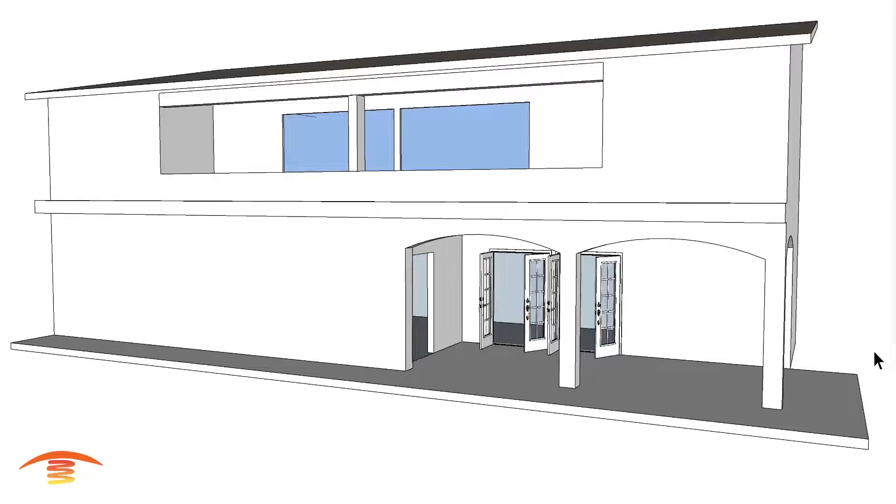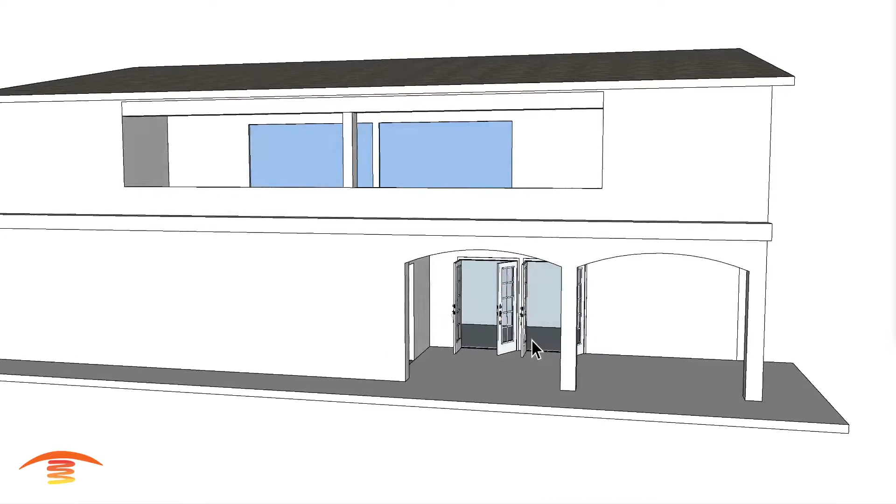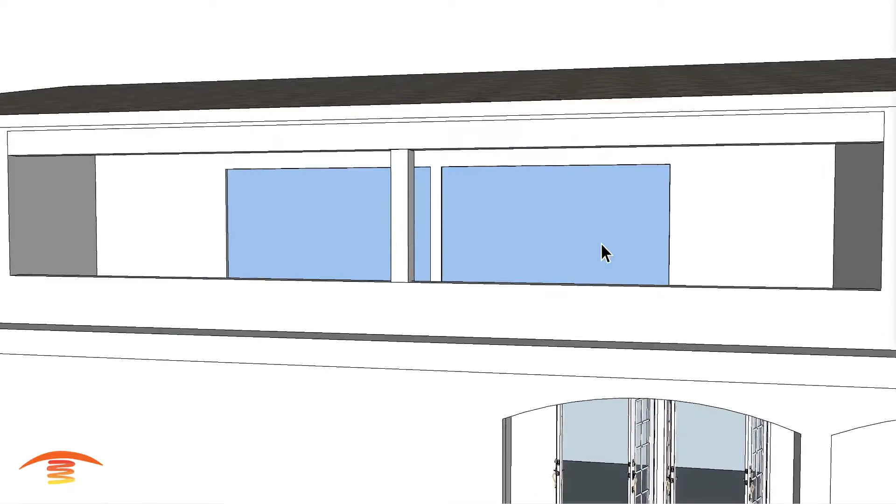Now let's get heating. We have this residential application, and there are two different sections they're interested in heating. This residence is still under construction, so there are some unknown issues with regards to seating and things of that nature. Also, upstairs here, I have this area with glass windows.

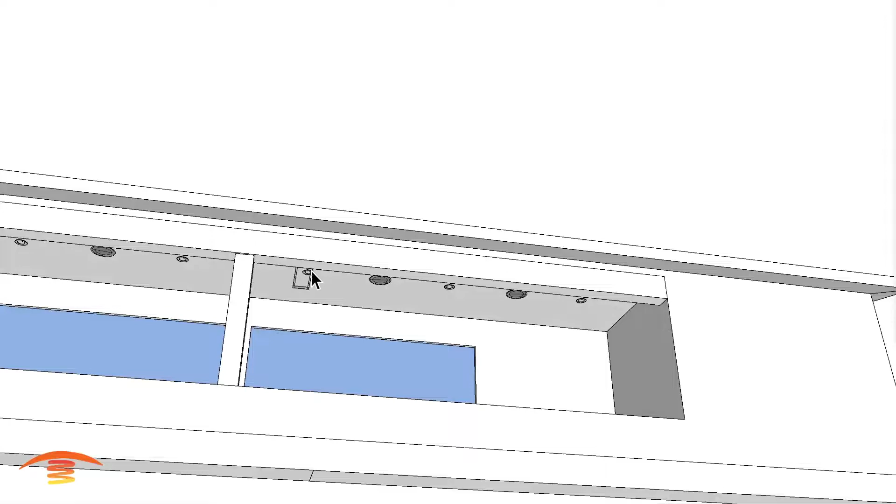Not sure of where the location is, so what I've done is taken the distances from the center and moved this 3.5 feet, this 3.5 feet, and this would be in the center of that. This lamp to this lamp would be 6 feet, this speaker to this speaker would be 6, and 6 feet to here, and the same is true on this distance over here. I just have them centered within the span itself.

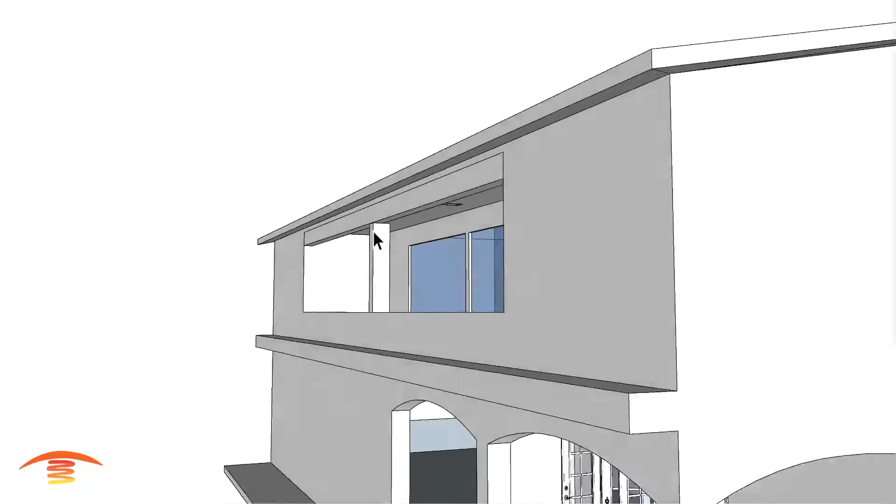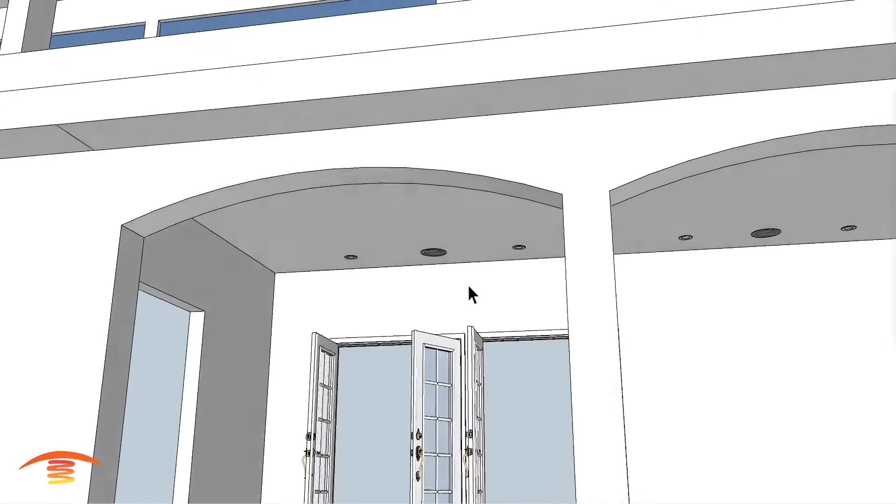This area here, we have some speakers and lighting. I have them 18 inches off of this edge of the wall to the center of the elements, lighting and speakers, and then 6 feet center to center, and then centered within this span here. Not quite sure exactly where they belong, but that's where I have them.

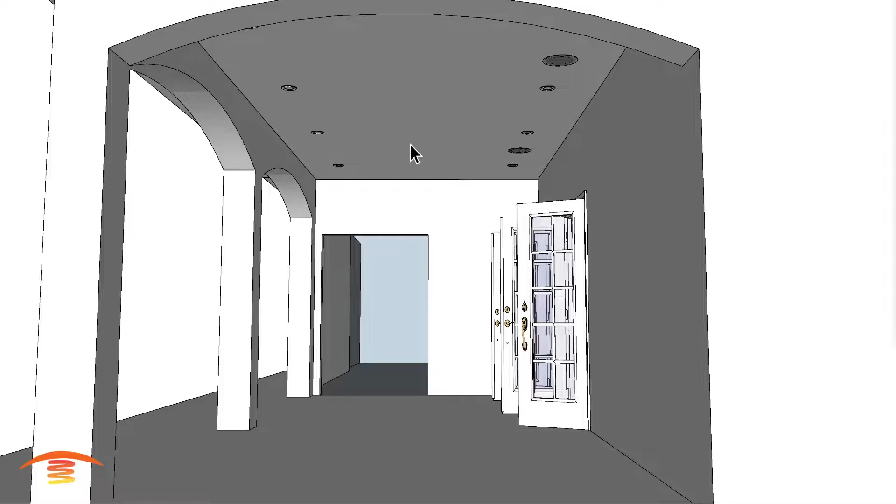Also, we do have French doors, or doors I should say, that swing out into the patio, so that's something else to look at. They did mention there's a possibility for fans in the center of this area, maybe 2 fans, probably more central than this spot here and this spot here. Again, I don't have the exact dimensions of those locations.

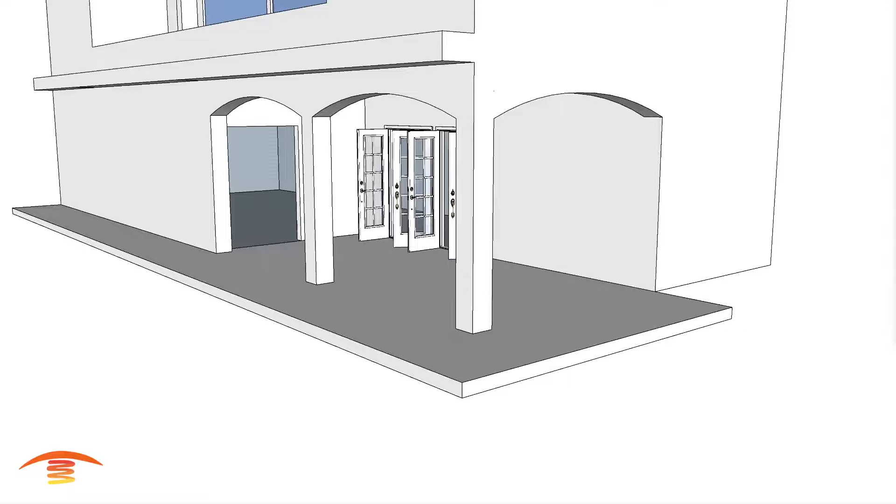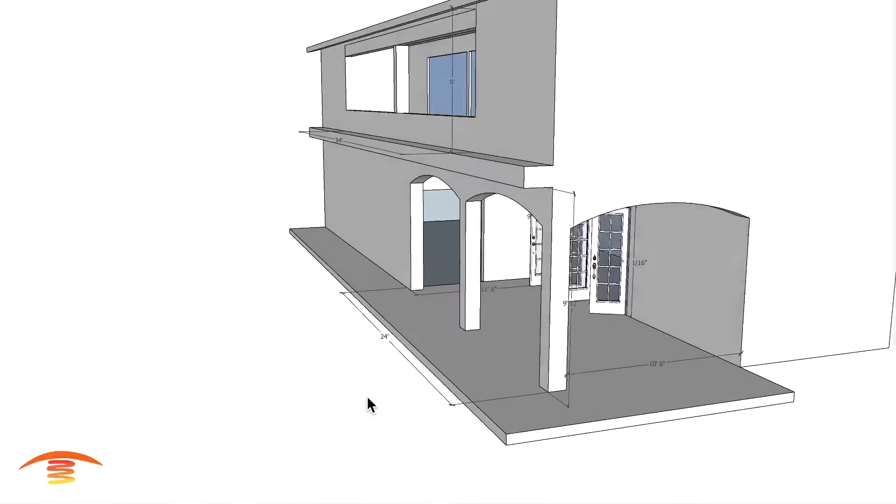However, if you want to have heaters in here at all, that probably cannot happen with regards to where they're located. So let's look at the overall dimensions. I have 10'6" from this wall edge to the inside edge of this pillar, and 11'6" to the outside edge here. I have a ceiling height of 9'11" to this ceiling from the finished floor. I have a total distance of 24 feet from this wall to the outside edge of this pillar.

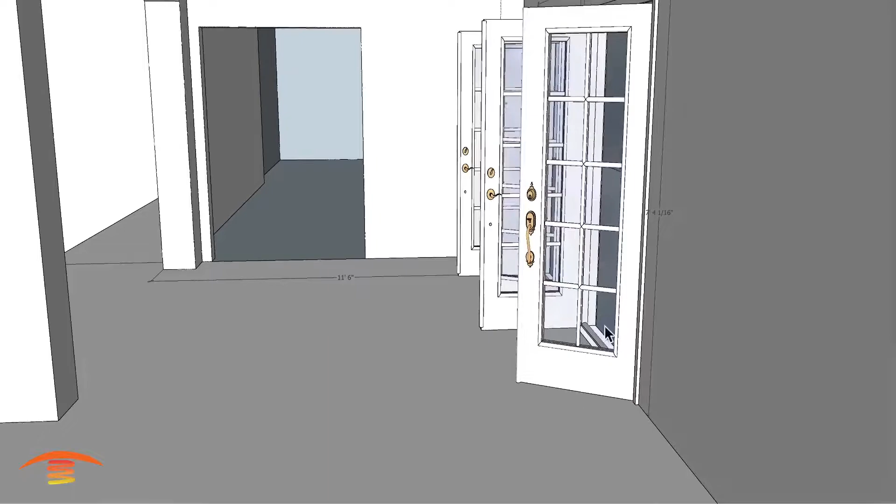Let's see if there's anything else. I do have the doors at 5 foot apiece, and that's very important because of the distance these doors are going to swing out into the residence itself. So it's important. I do have them about 7'4". Now they could be a little bit different in height, based on the trim, etc. Anything else here? I think that's about it.

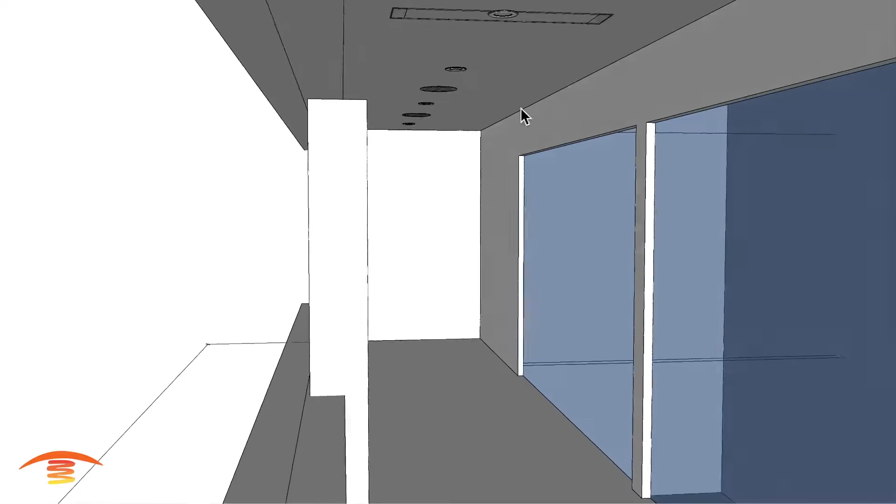Over here we have 34 feet by a ceiling height of 8 feet and a depth of the inside area here of 5 feet 4 inches. So that'd be from the inside of this beam here to the inside of the wall here, and 6 feet out to the edge there.

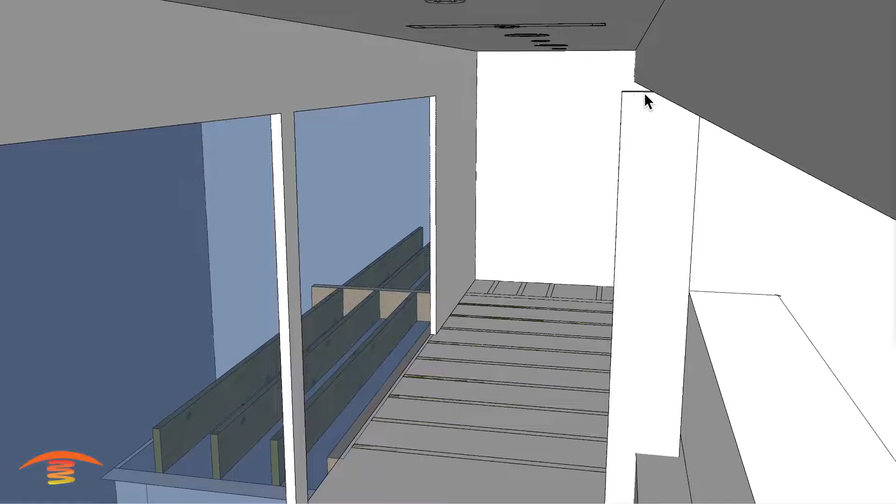I did notice that this column here protruded into this area, so that might be an issue that you need to look at, just because of the placement of heaters.

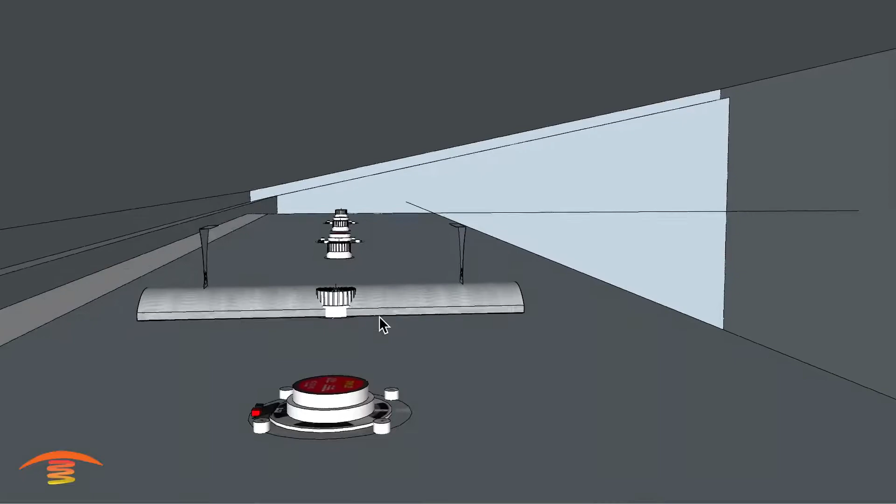Now, I'm going to go straight into this first, which is the upstairs area, and you can see here I have this unit possibly recessed into the ceiling. Number one issue might be, is there a light fixture there or not? I don't have it in the center, but the main issue...

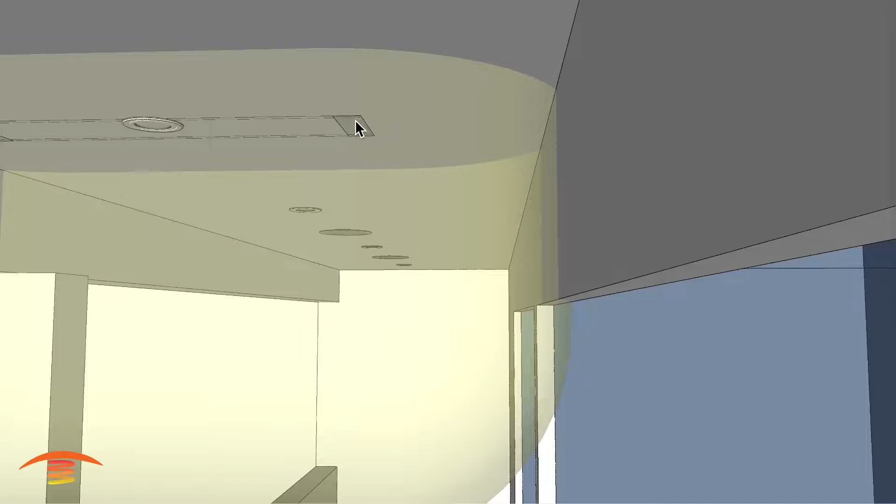The main issue is that we need to have clearances to combustibles below, which calls for, from the edge of the heater, not the frame itself - the frame would be a little bit larger, the flush mount frame - but from the heater itself we need 18 inches, and you can see we're not meeting that here, and we're definitely not meeting that here. So I can't see how we could recommend placing a heater like this. I'm just going to remove that.

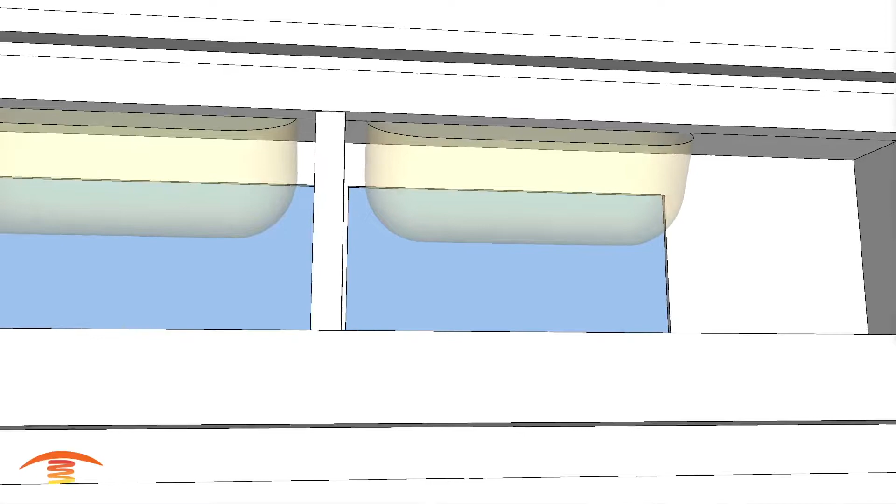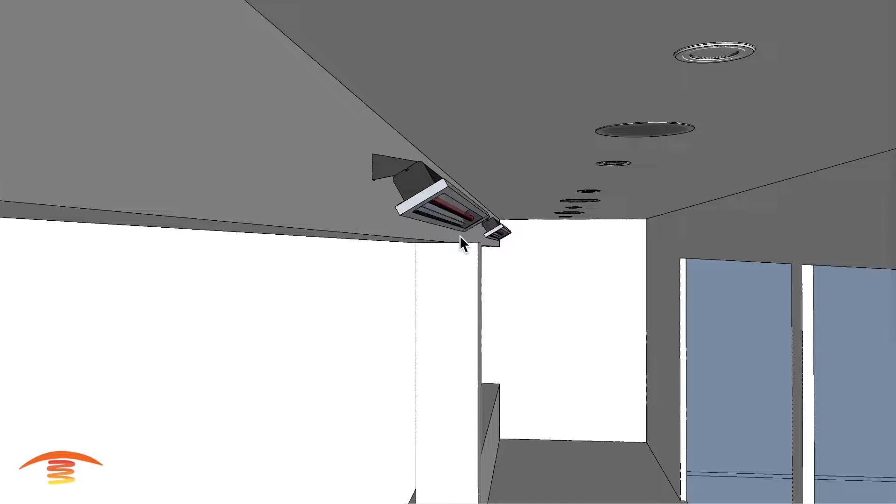All right, let's see here. The only other option that we can do is to possibly place a couple of units here, along the inside edge. So the heater itself, when it's mounted on a wall or a vertical surface - this is a slimline 4,000 watt unit - I have it at 60 degrees down from straight out, or you might consider it 30 degrees up from straight down.

And I have it attached so that we're meeting a clearance of 6 inches above, and that's the main thing we need to do on a slimline unit attached to a vertical surface. So that's what it would look like.

Let's see here if I can show you anything else. I do have them at 10-foot centers to center. Then going ahead and looking at the footprint of heat, the footprint would cover the inner space fairly decently, but we're still missing about 8 feet here and 8 feet over here.

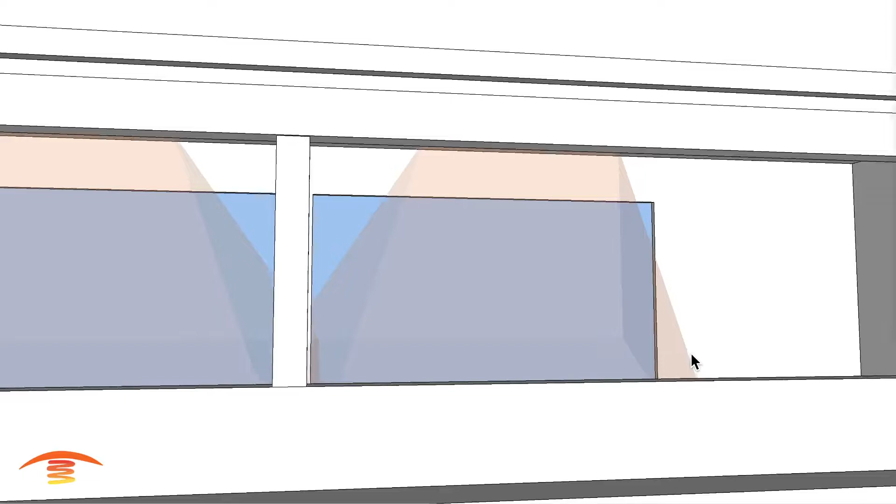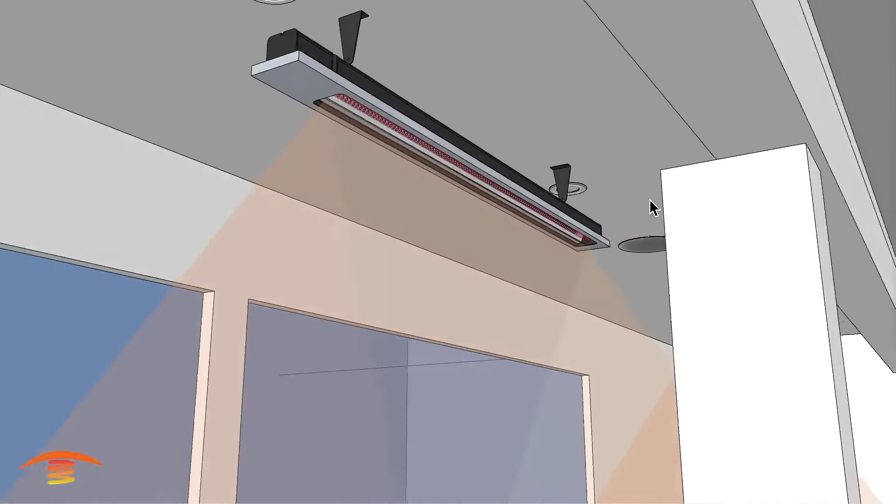So that's the best I can come up with regards to this little column piece here. Let's see if I have that here. If I put it in the center, you can see that I need to maintain a clearance of 18 inches here, and that's that issue again. If this column wasn't as protruding as I think it is, then we could do this setup here, but mount it up on the edge where we're getting better coverage throughout the whole span.

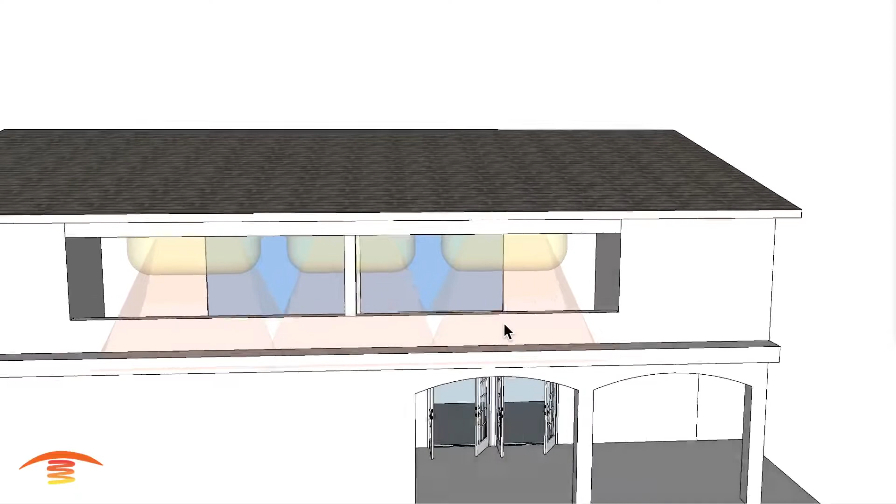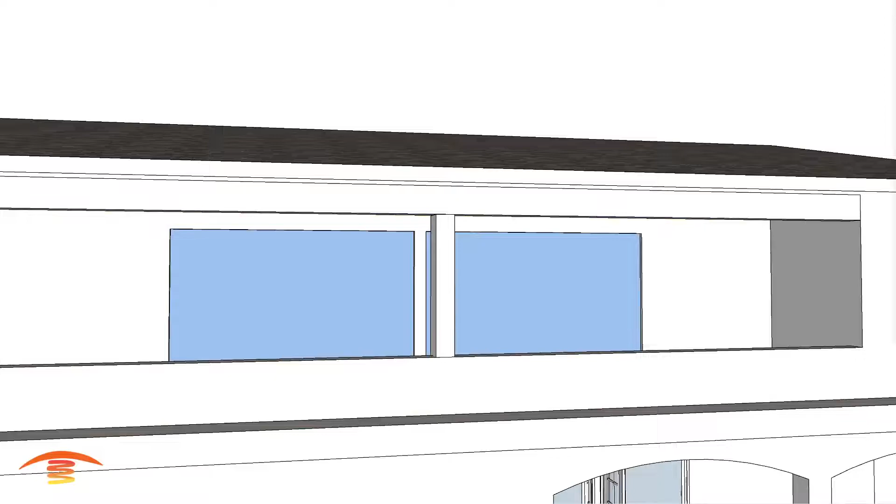So 3 units would really be the best, but visually speaking, this setup where we're mounting it on the beam itself would look the best. But again, having this column with this post protruding out, we are not going to be able to meet that clearance that we need to.

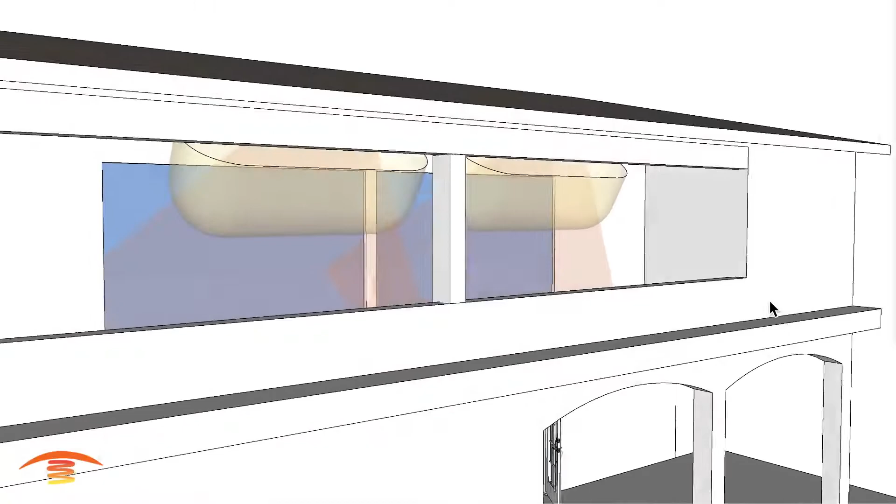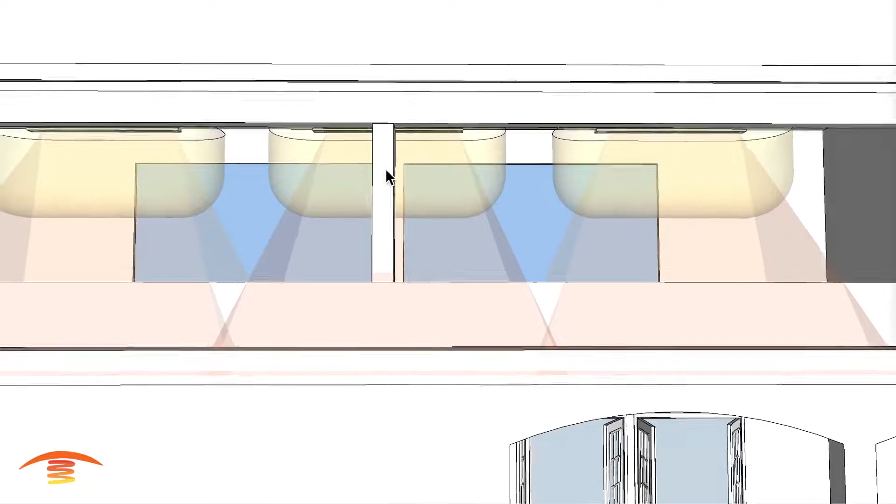All right, well, that's the upstairs. So that would be possibly 2 of the slimline 4,000 watt units, or possibly 3 of the slimline units placed in this configuration. Again, these are 10-foot center to center. This is centered in this room or space, and then again, 10-foot out to each edge. So again, that's upstairs.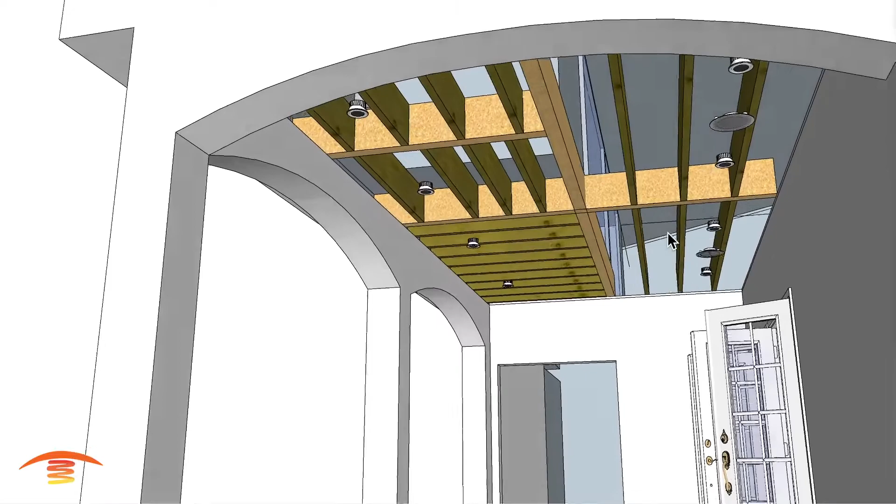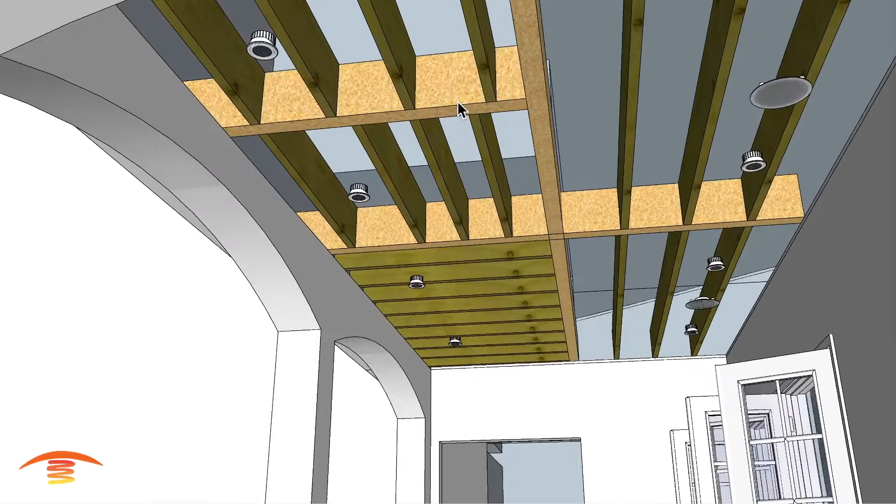Let's look at what we could do downstairs. So downstairs, first I'm going to talk about the recessing ability up here. I don't have all the dimensions, and I'm not sure exactly the locations of the lighting, etc. But I do see visual issues with regards to some engineered supports or beams that I don't believe you can cut into and make a frame for a flush mount unit.

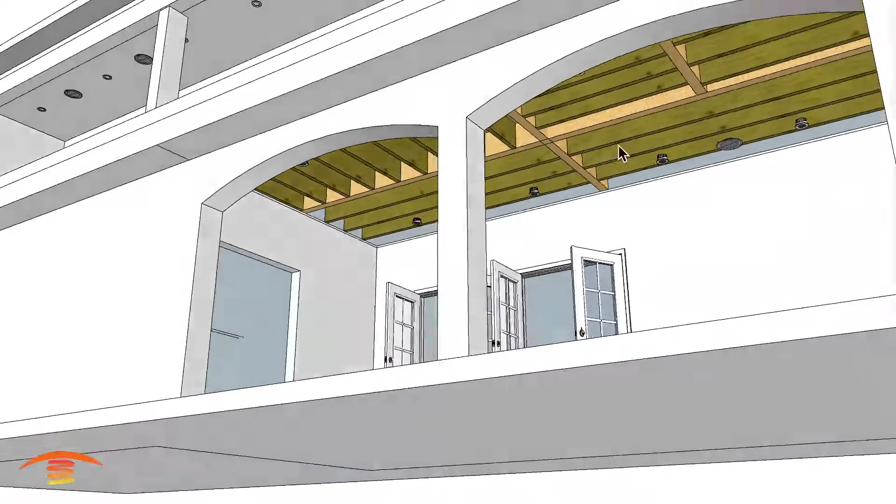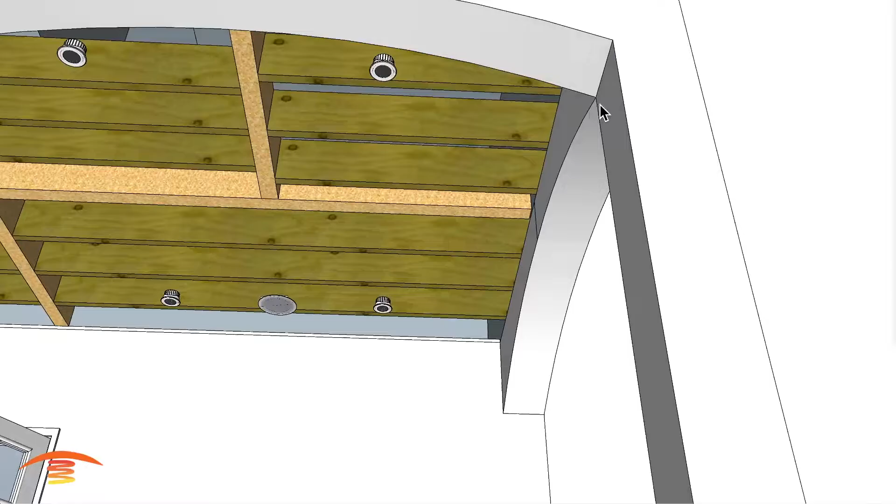Also, with these doors coming out here, I can't place a heater within this span on this particular side. I could put one over here, but I could not do that over here and still meet the clearances below the heater itself. That's why I'm not doing any type of flush mount. Flush mounts won't go through this span here as well, and same with the distances over here. There's actually a pipe between, I think, this one here. So that is not going to be a possibility as well.

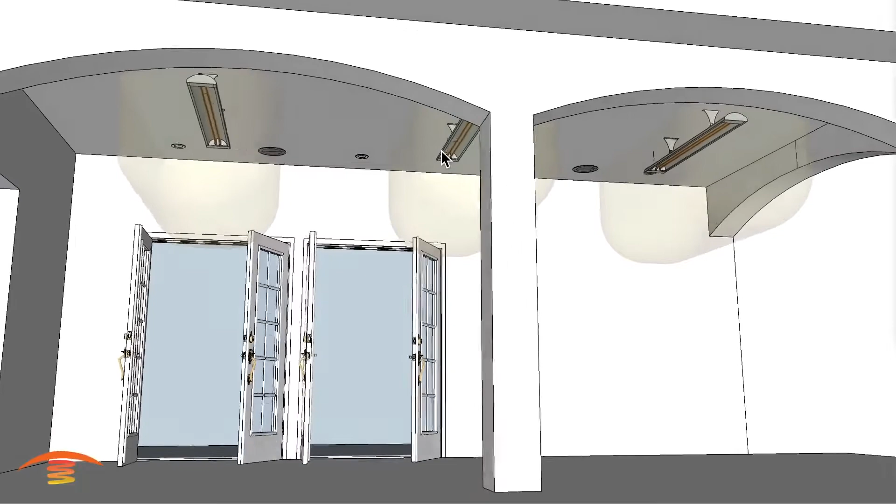So the only thing we could do is a surface mount, and we'll start with running 3 units here. These are 6,000 watt units, 240 volts each. I have them at 8-foot center to center. So from here to here, 8-foot center to center, this one centered within this column, and then 8-foot out center to center here. I have them so that they are 18 inches off of this edge to the inside edge of the heater itself.

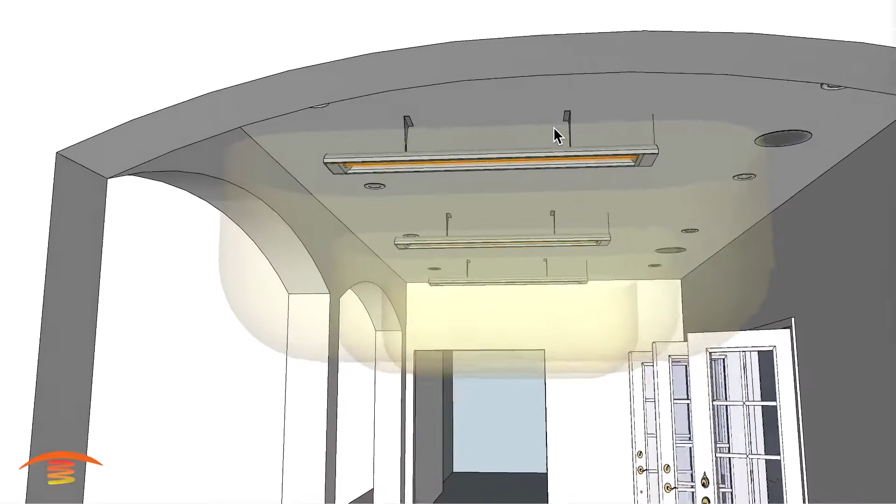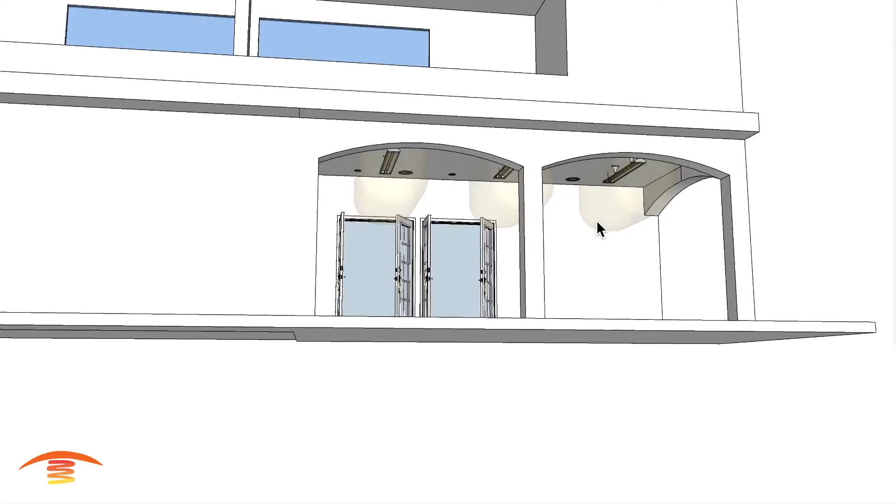It's important to note that if these doors are coming out any further or higher, something of that nature, then we really need to concentrate on that clearance issue. That's why it's so important to have all the critical details of a space, especially on a ceiling, in order to really make a recommendation. So these recommendations are based strictly on perceived distances, and if they are different from what I'm showing here, that is going to make a difference.

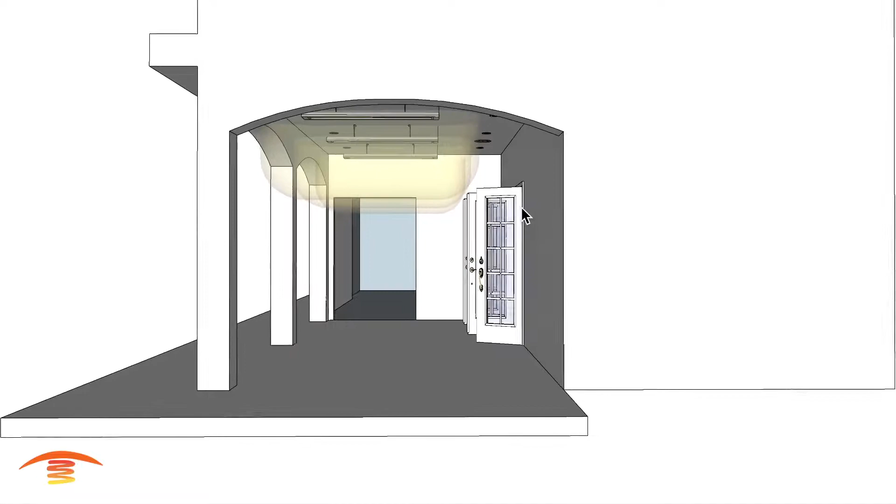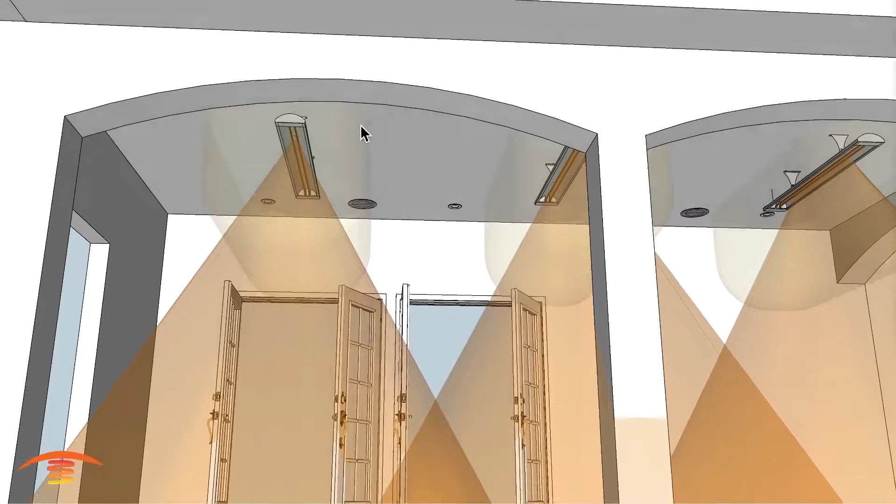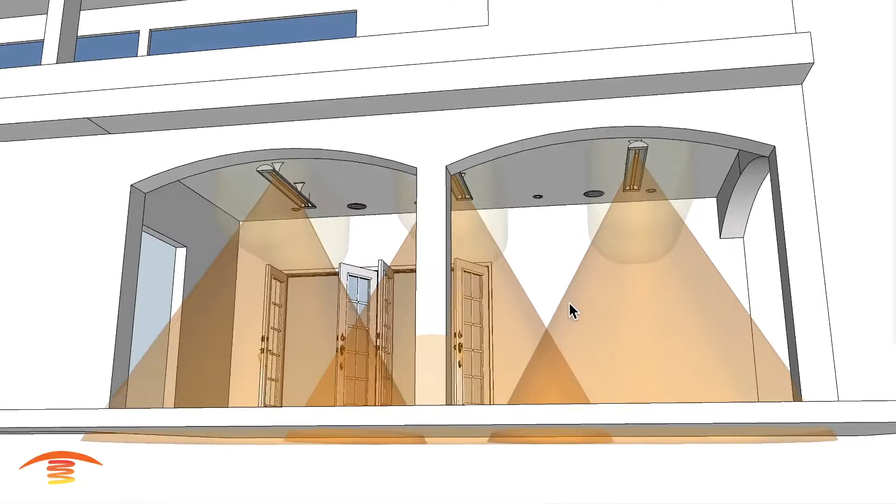Anything else? Let's go ahead and look at the footprint of heat. You can see here we're getting good coverage throughout this whole span. Now the one thing I don't like is that the heater itself, with regards to the lights, is a little off center, and I'd like to push it more to the right and this one more to the left, making it centered within these two lights. However, the footprint of heat would be way too much in the center, so this would be the best heating application here.

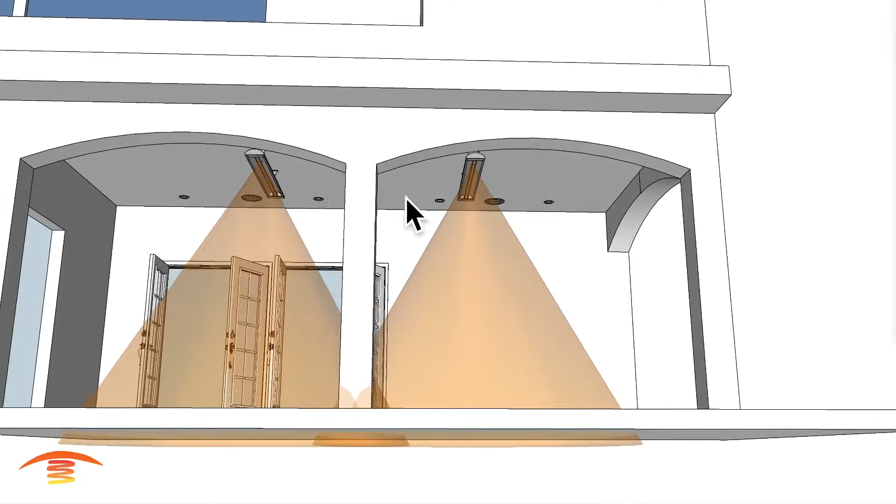Let's look at another option we could use up here, which would be possibly using 2 units. Again, we're not centered within the lighting and speakers, but we are 10-foot center to center on the heater from this point. So 5 foot in, center to heater, 5 foot in, center to heater. Again, located at the same 18 inches off this edge, and hopefully we're meeting the clearances on this door.

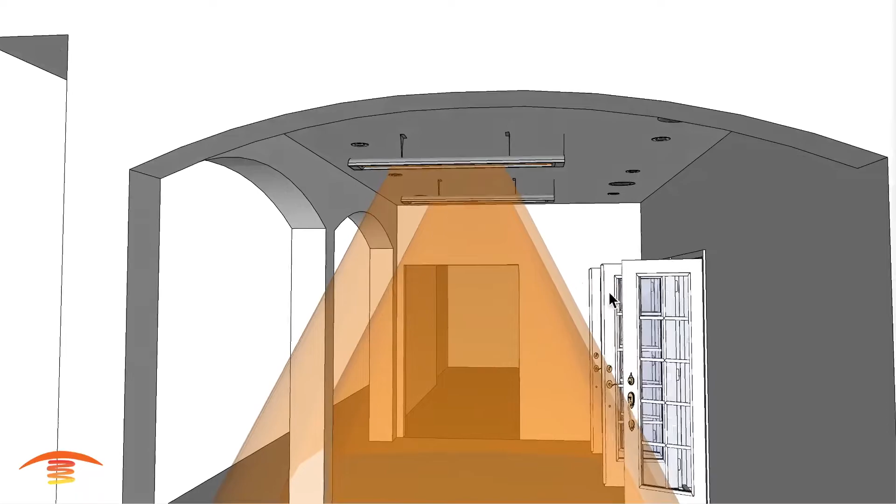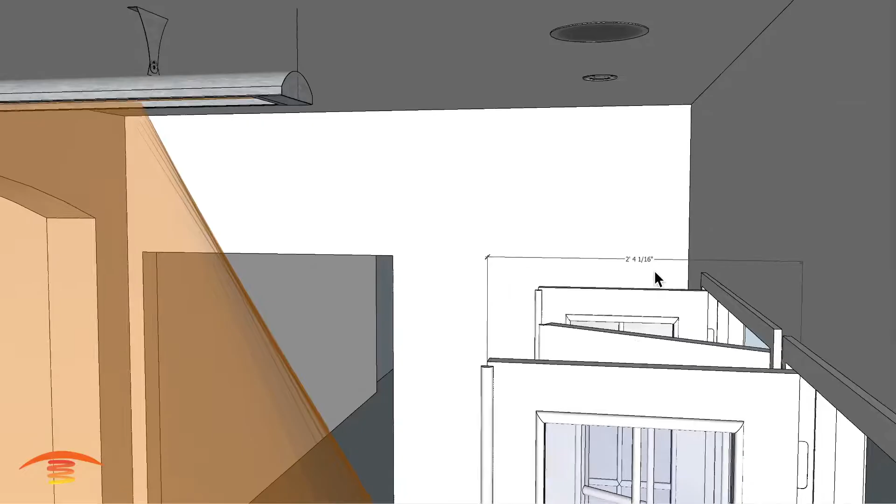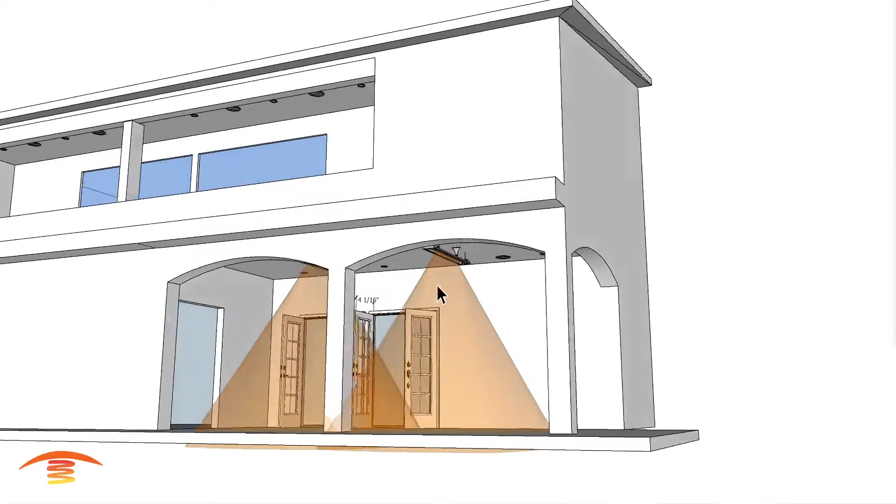You can see this one door here I do have out at 90 degrees from the wall. If we look at the distance I have, we can pop that over and just see what we've got. Let's go to right there, and you can see we're at 2 feet 4 and 1/16 inches protruding out from the wall. So that is important. But here's 2 units, 6,000 watts again, mounted on the ceiling at 10-foot center to center.